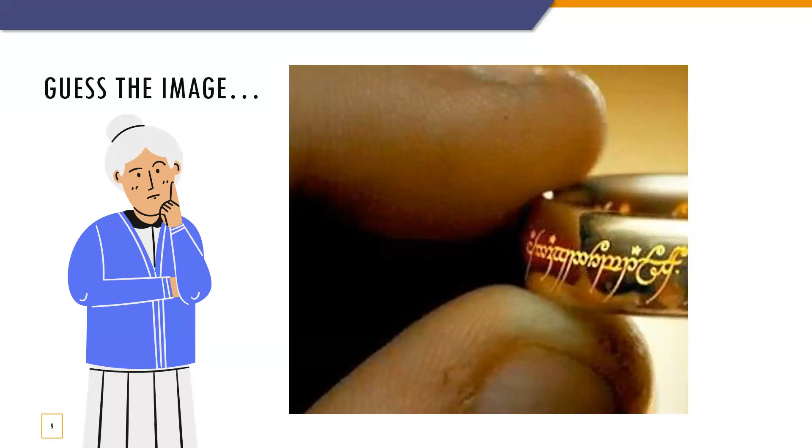Next one, who can guess this image? And I know this is going to give some folks some nerdy cred. Great, looks like many of you got that one - Lord of the Rings. All right, guess this image.

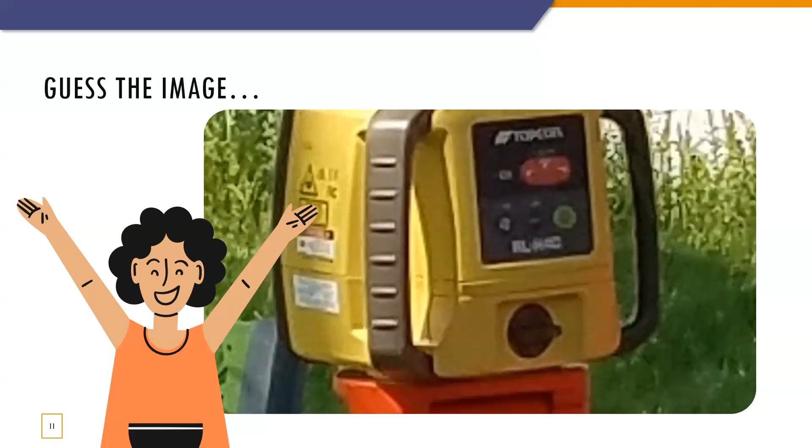Any other guesses? All right, well, it looks like Gabriel, you get the prize for this one. It's a laser level. All right, next one.

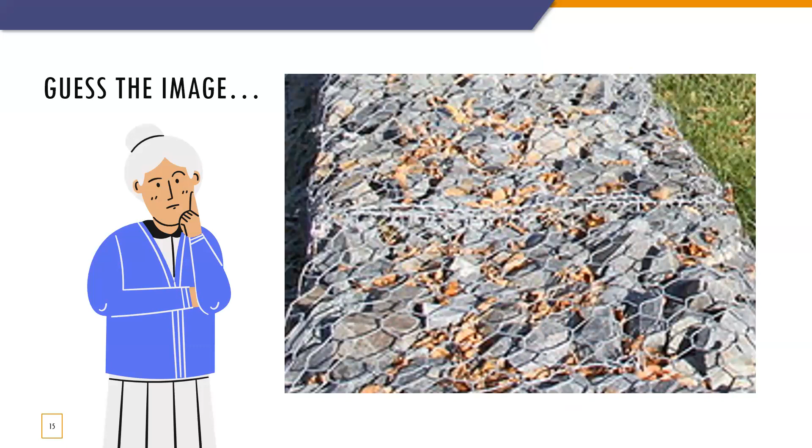All right, now this one is kind of on theme for today. What can you guess what this image is? Nice, all right, great job. Yep, gabion basket. And this is from a site in Baltimore, Maryland.

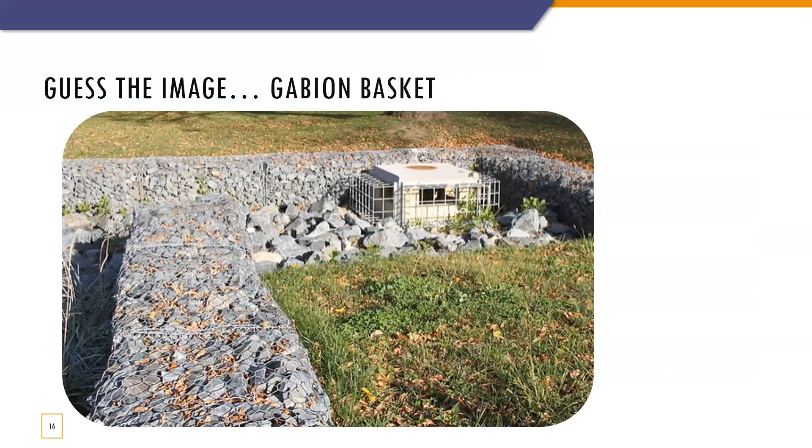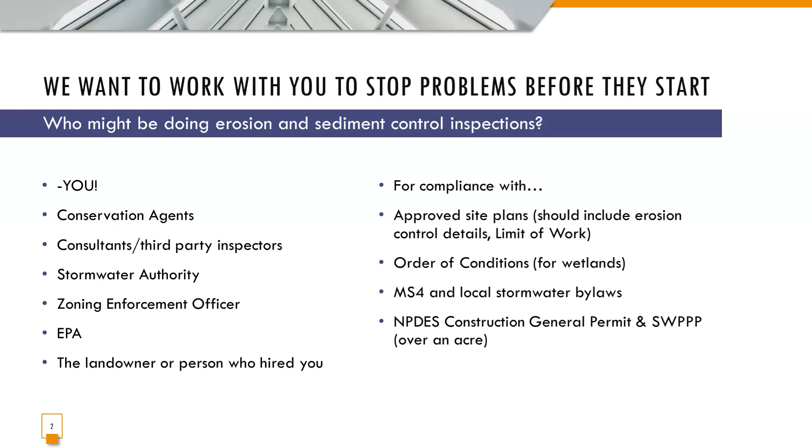So I did want to start at the beginning. A lot of owners and even some contractors don't realize that there can often be a lengthy permitting process before you ever get to put a shovel in the ground. If you're going through a local board like the Conservation Commission, the Planning Board, the Zoning Board of Appeals, or for your state permits, sometimes you might need MEPA review. All of that can take several months. I've had projects before my boards that can take in excess of a year, usually when we're waiting on engineering changes between revisions. That's unusual, but make sure you plan to have a healthy amount of time to get through that permitting process before you want to put shovels in the ground.

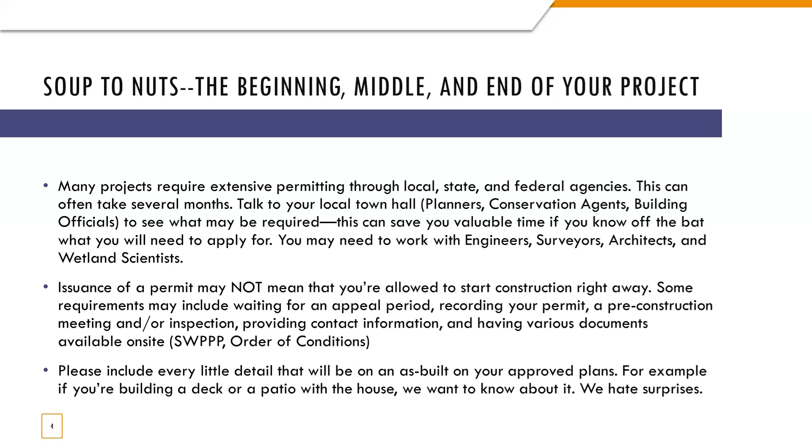So record your order, wait for the appeal period. You need a sign with your permit number. You need to let me know who is going to be monitoring erosion control on your site, whether there's a field engineer, and who the responsible parties are, so I know who to call when I want to schedule an inspection, or if I'm stopping by and see a problem.

You want to make sure everyone on your site understands what the applicable conditions are. And I always go out and do an erosion and sediment control inspection before you start work. So the first thing you do is put in your silt sacks, your perimeter silt fence, and straw wattles - that's before any cutting of vegetation or grubbing that needs to be installed.

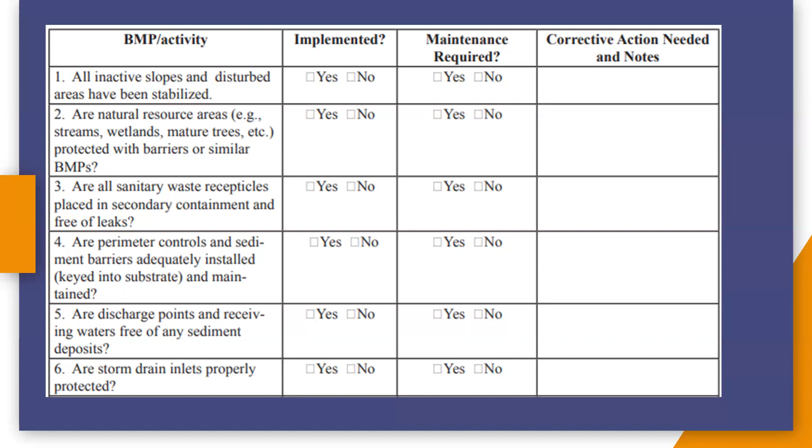Storm drain inlets properly protected. I'll be looking at construction entrances and exits, trash and litter, washout facilities. So making sure you're not washing out your concrete into your storm drains and into your wetlands is a big one.

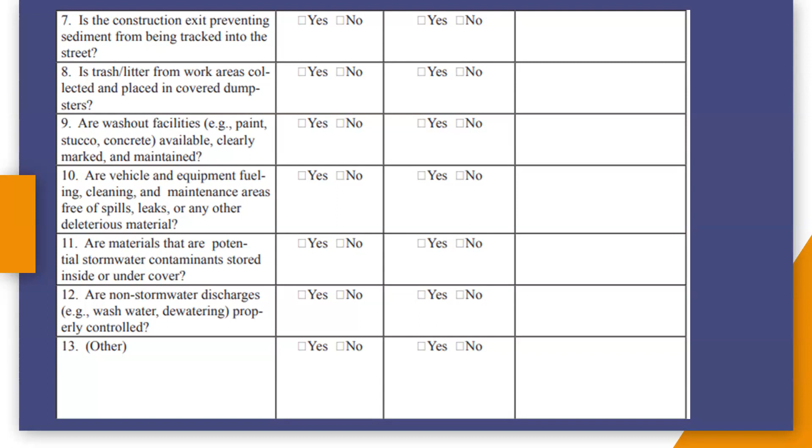If you have fueling, checking on that. Checking on contaminants, and then looking at non-stormwater discharges. If you're using wash water, if you're dewatering, maybe you're spraying for dust, maybe you're testing the fire hydrants on site, and what's happening to that water, and is it potentially causing a problem.

One thing that I want to emphasize is when we approve a permit, we really want everything that gets built to be the same as what we approved, except for your erosion and sediment control plans, which we really want to change with the needs of your project as needed.

Your project is going to be always changing, and what you're going to need on site is also going to be always changing. You may be required to have extra erosion control materials on your site, but if you're not, it's still a great idea.

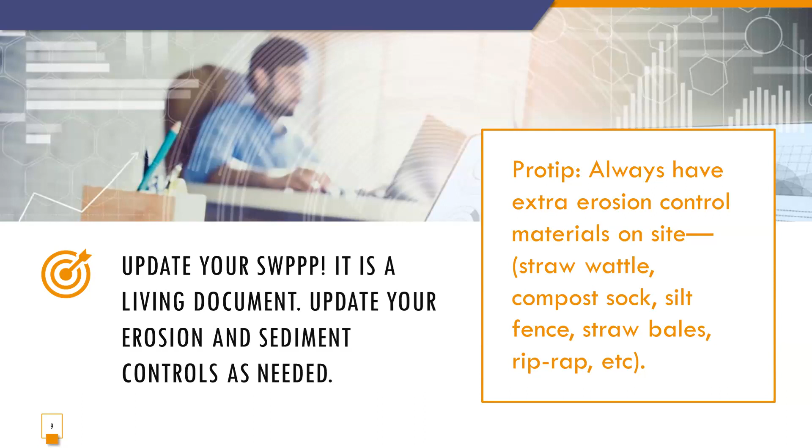Keeping extra silt fence, straw bales, riprap, whatever you may need to do a quick repair, a quick maybe second layer of erosion control to make sure that you're able to be quickly responsive to emerging problems or changes.

Some examples of things that I see often: you've been using one construction entrance that's properly protected, but for whatever reason, you need to go in through another way. And by now, maybe you're mid-construction, you didn't get the rocks that you need, and so you just sort of open it up.

Make sure your new entrances are stabilized. You're doing the perimeter controls around new places. Maybe there's a new source of water that you're adding to your site.

And checking if you're dewatering, if you're doing anything like that, making sure that your controls are working. So are your silt sacks catching silt? Are they clogging? Is your filter bag leaking? Right, just doing all of those sort of routine checks to make sure everything is working the way you think it should.

And we know that things can go wrong. Even the best laid plans can go awry, whether it's from unexpected bad weather or you hit a water main. This recently happened at a project in Norwood.

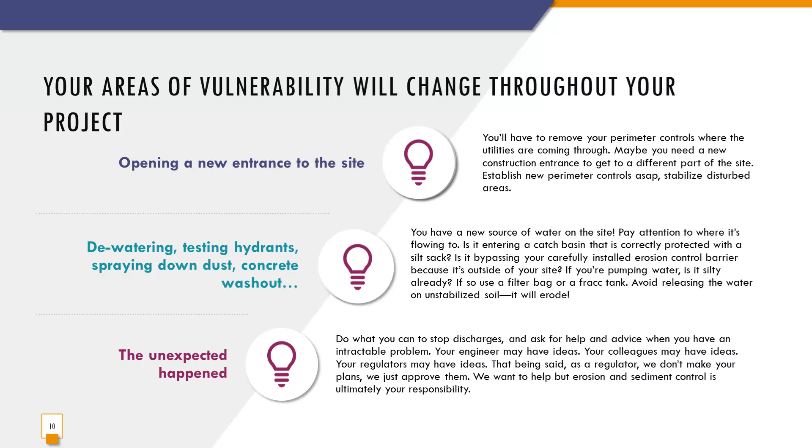So I wanted to end with just some fun photos from Norwood. This is a photo of a recent wetlands violation that happened because of a catch basin several hundred feet away from the wetland, and the catch basins close to the wetland were actually extremely well protected.

That's the one on the left. So I saw the wetlands violation first and then had to sort of backtrack and find out where all of this sediment was coming from.

I went to the site on the left first and quickly realized that it wasn't possibly coming from this site, and actually several hundred feet away from the first construction site I went to was another construction site that wasn't being regulated at that time by an order of conditions or by an NPDES CGP.

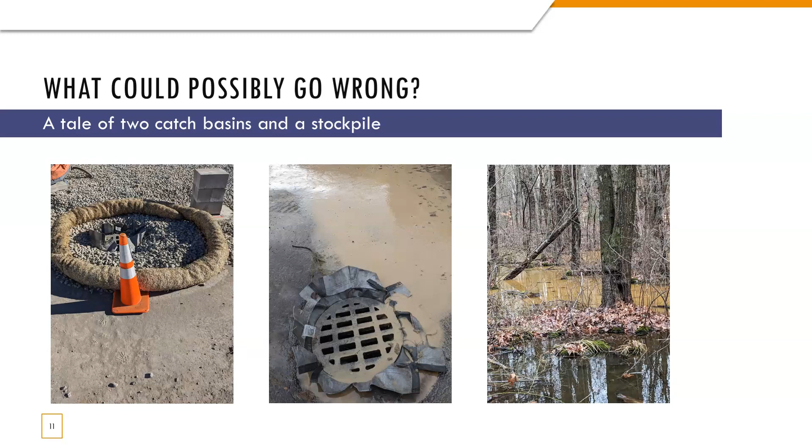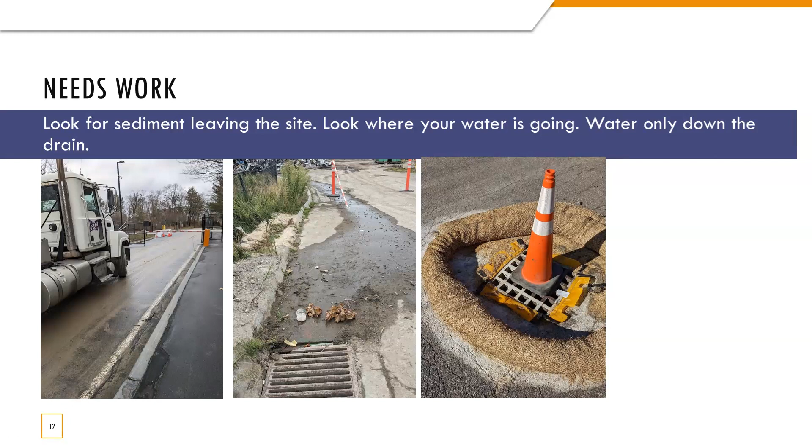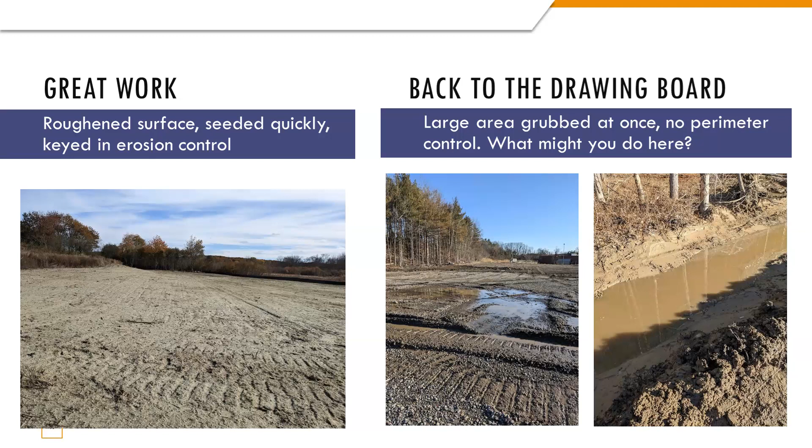And then at the site on the right, all of those things still need to happen. There's no erosion controls. Maybe they did dig this channel, but maybe we would want to see check dams or something like that in the channel to catch some of this silt. And there, it wasn't quickly seeded or tackified. So a lot of those things can really help when you have to go ahead and do that kind of grubbing on a large area, which is not recommended.

And then the last thing I wanted to mention as a regulator is that it's so important to close out your permits with us once you finish your project. For the orders of conditions that the Conservation Commission issues, those orders are recorded on deeds, which means that it may be harder to sell the house, or whatever the property is, whether you're selling it or whether it's somebody else's property and they're not going to find out that they have this cloud on their deed until 20 years down the road.

Either way, it's really important to wrap that up so that you don't find out too late that there's still work to do before you can close it out. One thing that we get a lot is, oh, I need a certificate of compliance today because I'm closing on this house tomorrow, or the opposite of, oh, this project was completed in 2004 and we never got a certificate of compliance. The engineering firm that designed it has closed.

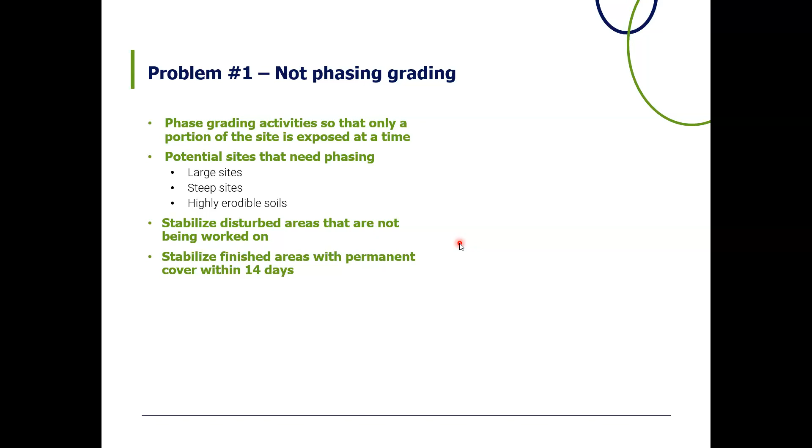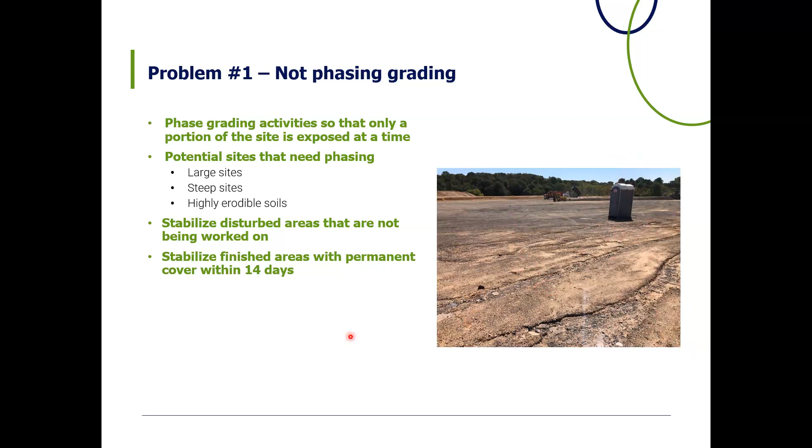So let's see some examples of good stabilization: matting and seeding. This is your erosion control blankets, and then hydroseeding is also a quick one that you can use to stabilize your area.

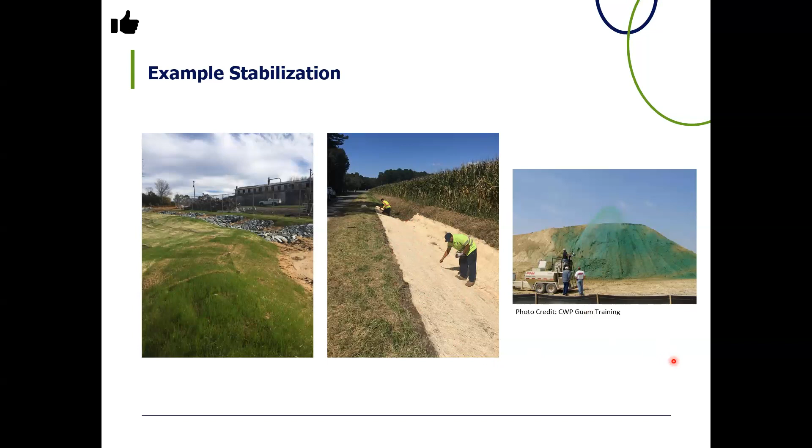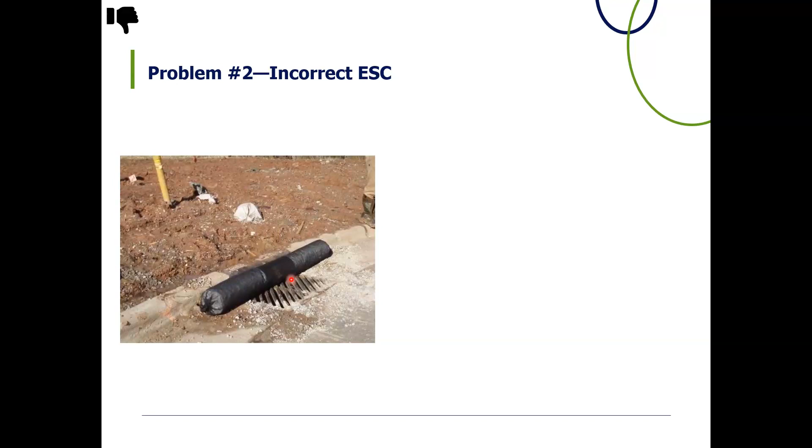Here's another one. This is not how you connect two different pieces of silt fence. Again, probably a training issue that people didn't know the proper way to do this. And also, if you truly understood what the purpose of silt fence was, you wouldn't have done this - there's obviously going to be a hole underneath between the two fences where water could go through. It's supposed to be a barrier for water to filter through the silt fence before it goes to the other side. So there's a little bit of training that probably was necessary for this situation.

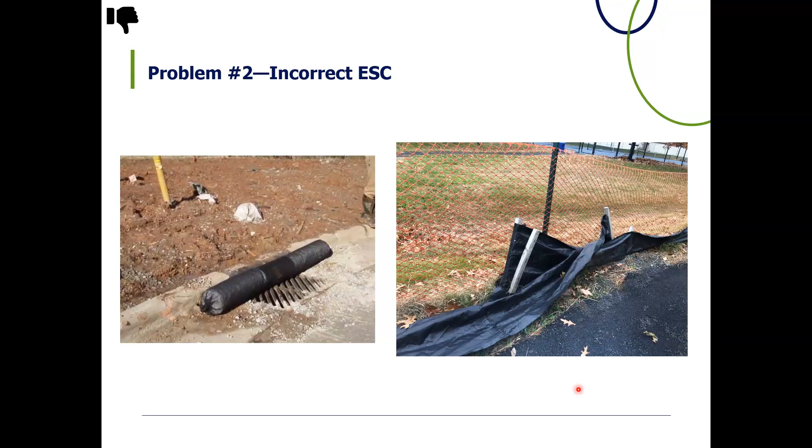Problem number 3, poor management of stockpiles. Temporary stockpiles should be stabilized with seed or other covers like a tarp. It should have sediment control around it, like a silt fence. And then it should be placed in appropriate areas. I think that one is one that people don't think of as much.

So this example is that it's on a paved surface, which is not ideal. Some places don't allow it, but some places do, because silt fence on pavement is a spec that some people use.

You shouldn't be adjacent to a stream or a storm drain. Don't put these right next to a storm drain, because if you have inlet protection, it's going to clog really, really quickly. Either you're going to have to maintain it all the time, or you won't maintain it and you'll just flood out your site. Or the guy maintaining it will just poke some holes in your inlet protection because your site's not draining. So there's a lot of reasons why you don't want to include these near your storm drains.

The other one that I think people don't think about as much is that it shouldn't be near concentrated flow. This site water flows towards those greenish containers through this valley gutter. So what's going to happen if it rains really hard is it's going to pile up into here, right? Water's supposed to go in from the parking lot outside of this picture. It's just going to run straight into your stockpile and erode all of it away downstream to your next inlet. Being smart about this really just saves the contractor time, so you don't have to keep maintaining it and you're not losing your stockpile either.

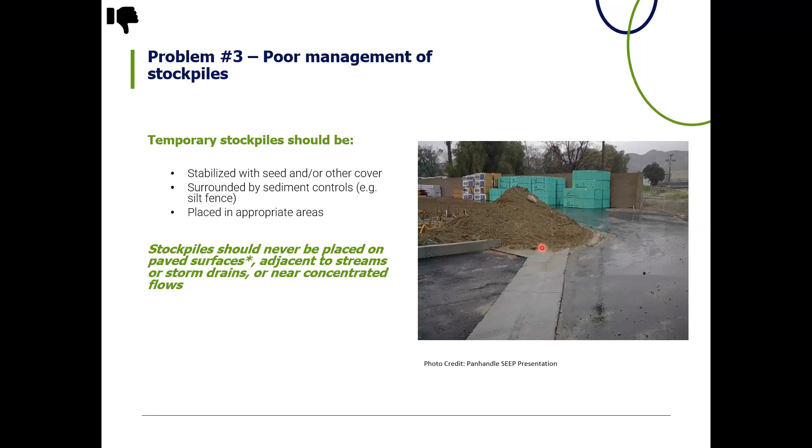Here's another example of BMP maintenance. Even if the best BMP could be installed, if you're not inspecting and maintaining it, it's not going to work properly. This is a filter bag that probably got clogged and needed a new one. Instead of maintaining it, the contractor said, my pump isn't able to pump through the filter bag because it's clogged, so I'm just going to poke some holes in it so the water can leave. That obviously defeats the purpose of the filter bag. The point of a filter bag is to filter out sediment before you release it, but look at how much sediment you're releasing into the water.

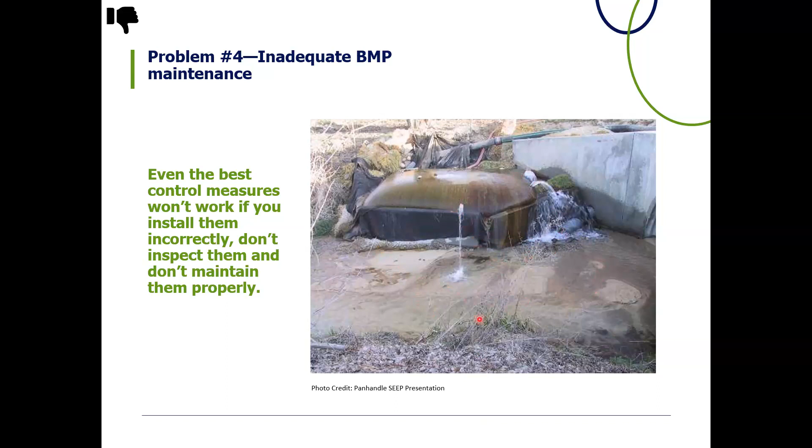You should really inspect daily and after rain storms, definitely after rain. Here's an example, and it's actively raining in this picture. It's a little hard to see, but this probably was already filled up fairly high on that silt fence before this rain happened. Sometimes it just rains a ton and it's really hard to control.

Erosion sediment control is typically designed for like a 2-year storm, so for those really big storms, you can't stop everything. But in this situation, this silt fence did not have enough room above it to hold in even a tiny storm. I think they were grading the dirt into the silt fence, so there was even less space to allow water to filter through. You really should check to make sure they have the capacity to hold the water that's going to come.

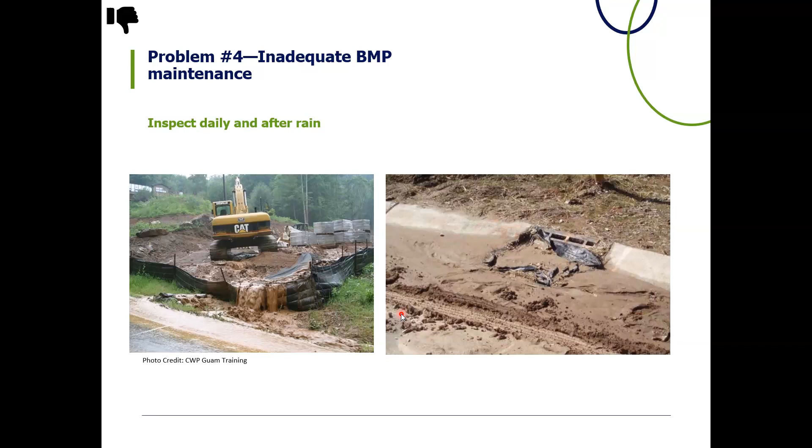Just another example of likely erosion from upstream clogging this inlet. Water is just going to end up ponding right there because it can no longer filter through. In every catch basin, we're not covering it completely so water can't get through—there should still be some filtering before it goes into the inlet. In this situation, water might be able to go through these holes, but there's just way too much sediment on here for it to really work properly.

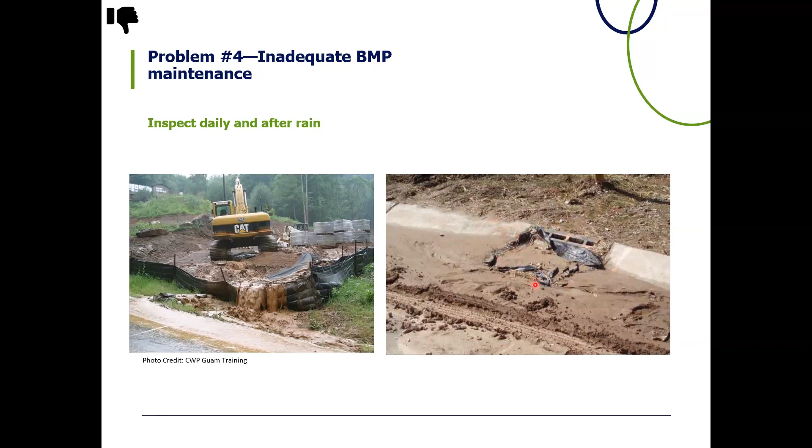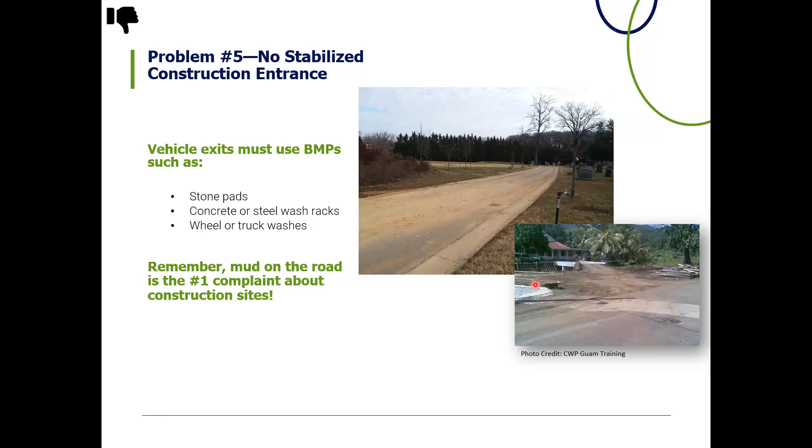Problem number 5: no stabilized construction entrance. I think Holly talked on this point. When a vehicle leaves the site, it should roll over some stone pads, like a stabilized construction entrance. You could also include wash racks or washing stations before vehicles leave the site. Mud on the road is the number one complaint on construction sites, so it's something you should be aware of. Here's an example of a really nice construction entrance.

They have these fences so you can only enter in this one direction. Sometimes you have a stabilized construction entrance, and then a contractor might go like 10, 20 feet down the road and drive off, not over your stabilized construction entrance.

So this really only allows your vehicle to travel into the site through one entrance. The rock is clean. Stabilized construction entrances don't last forever - it depends on your project, but it might not last for your whole project time. And once it gets clogged and isn't able to shake the dirt off the tires, you should replace the rock.

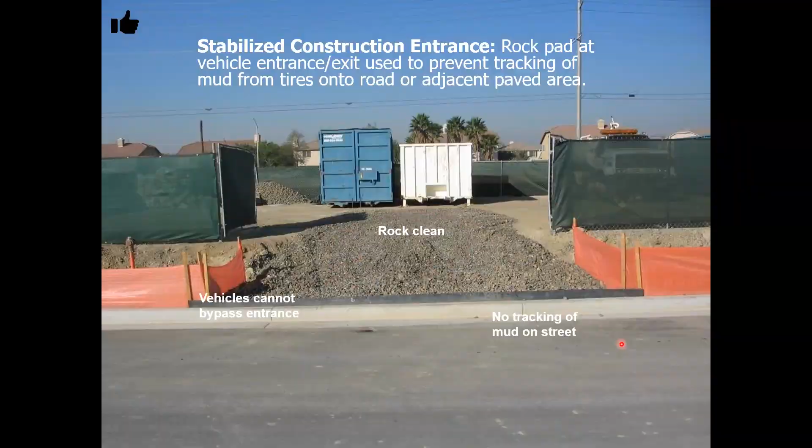Problem number 6, dewatering and other pollutant discharges. You should never dewater directly into a stream or into unstable soils, like steep slopes or erodible soils. You really should try to find a flat, grassy area where you're dewatering into a filter bag or a sediment trap or sediment basin, to allow some of that sediment to fall out or be filtered before you release it off your site.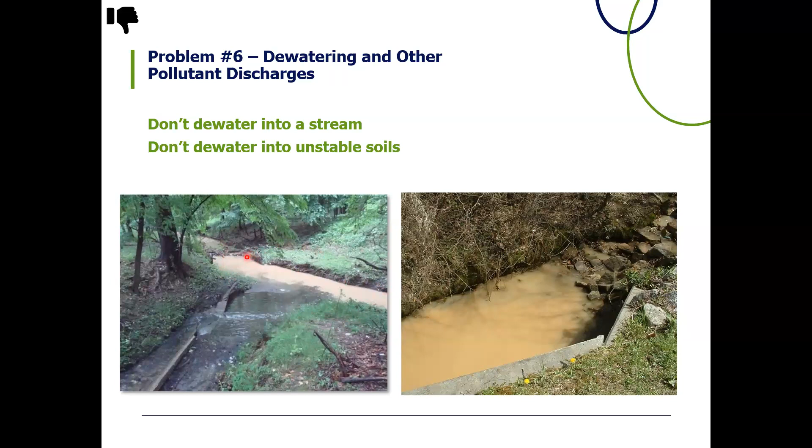But in most situations, you want to protect your inlets, because that's where water is potentially leaving your site that is not clean and not filtered.

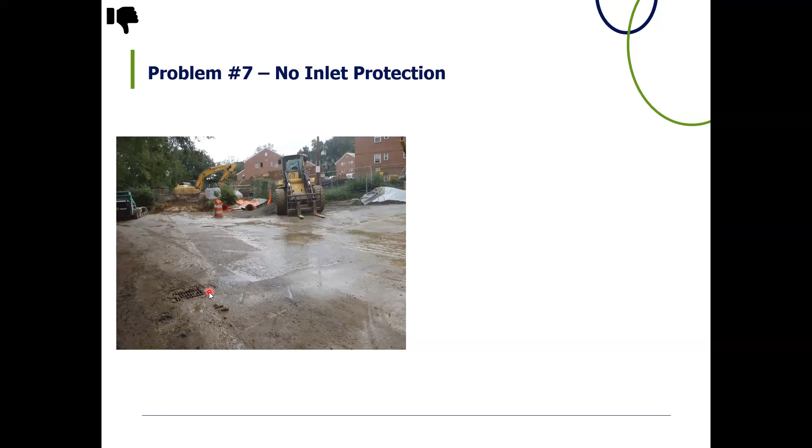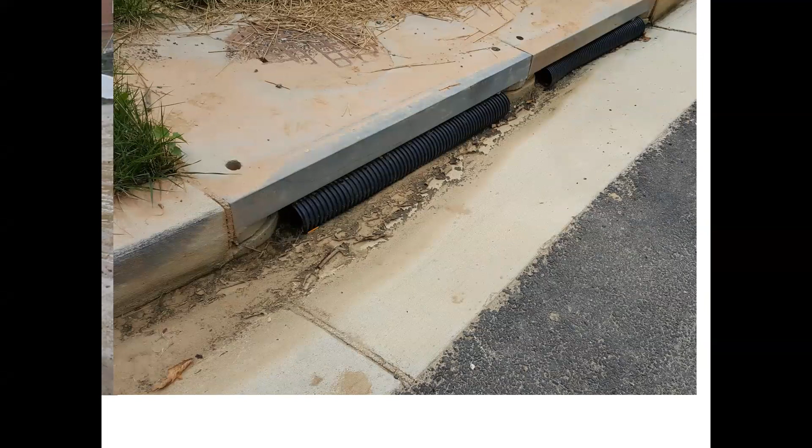Here's another one - this might actually fit better in the erosion sediment control section - but this inlet is covered. It kind of looks like a filter log, I don't know if the picture is close enough to see, but they're not filter logs, that's a corrugated pipe. Whether the contractor just didn't have filter logs and thought this looks close enough, I don't know what the situation was, but obviously this is not proper inlet protection, because the unfiltered water is just going to flow right into the gap that exists here.

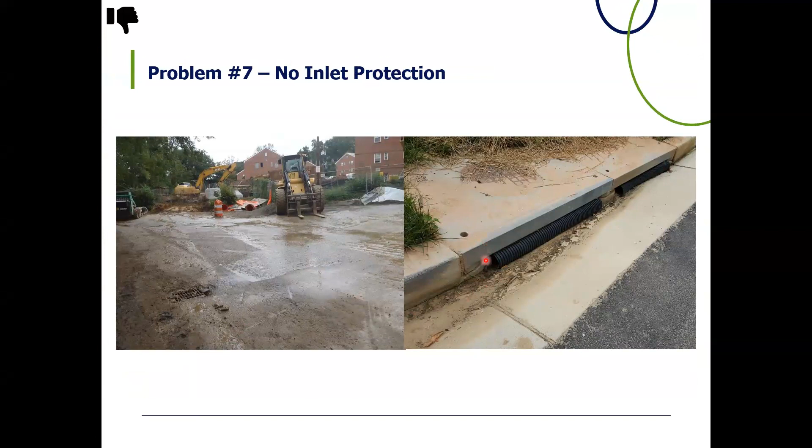Problem number 8 is not protecting the site. Really, this issue can start from the plan review side - delineating and making sure your natural resources are delineated correctly is really important. But then the contractor actually delineating and making sure they're protecting the areas is also the next step.

Protecting areas like wetlands, forested areas, and streams. Another issue in line with that - you might have delineated your area, but if the contractor doesn't stay within their LOD, their limit of disturbance, that can cause problems too. The LOD is there for a reason, because in the planning phase they planned to protect these areas, so you can't roll your excavator over those areas.

One other point that's a bit different from the rest of this presentation: you should not compact soils if that area is meant for infiltrating stormwater control measures. For example, if you're putting in an infiltration trench or a bioretention area, it shouldn't be along the main path of your construction site where your excavator is rolling over and over again, because the whole point of that area is typically for infiltration. So I've seen some contractors put silt fence around where an infiltrating practice, like permeable pavement, is going to be, so they're not compacting that subsurface soil.

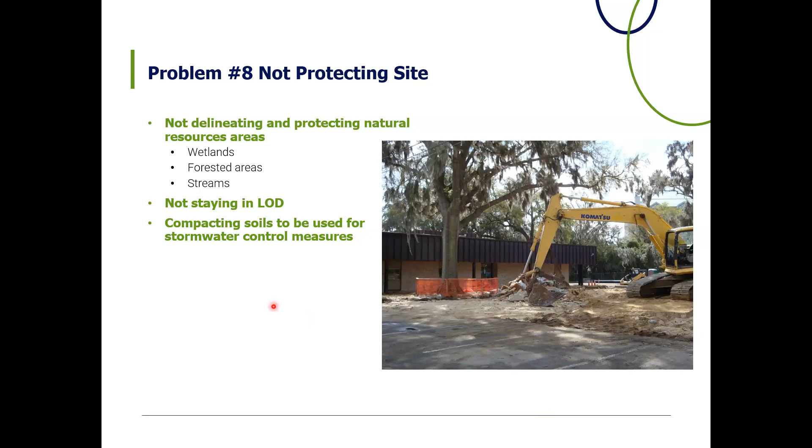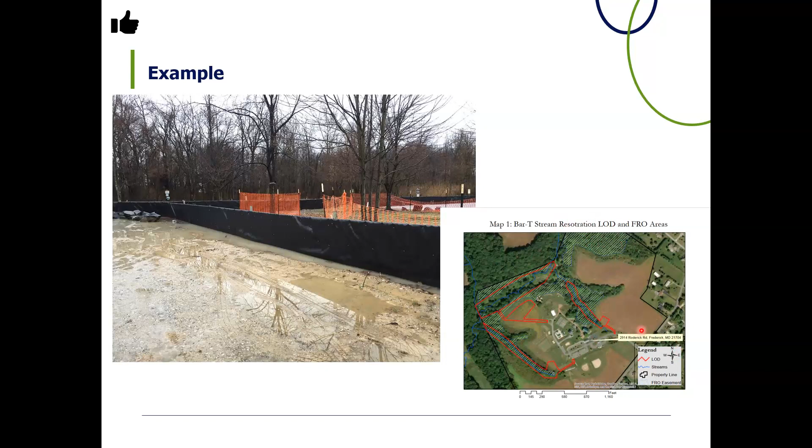So this is a great example of a protected area. A lot of times on your plans there will be designated protected areas, and it's kind of - you start there and look to make sure you're delineating on site, fencing off the correct areas. Sometimes it will look like this - this is a forest retention area. On the other side there, I think it was a forested area, and also there was a wetland on the other side as well.

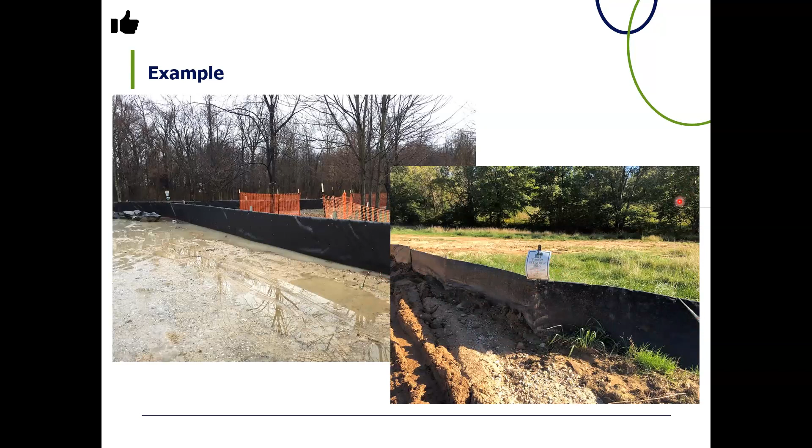So that's it. Are there any questions?

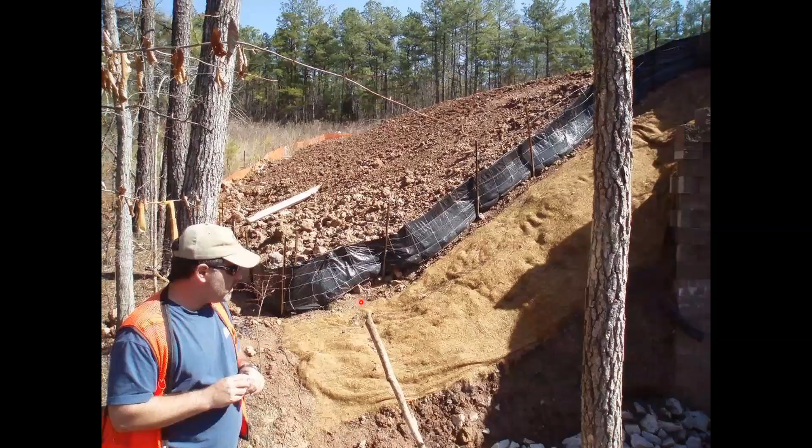Okay, now I'm going to test you all about your erosion sediment control knowledge. Next I'm going to show some pictures, and you guys can unmute or put in the chat box what you see. We can start off with what issues you see in these pictures. So here we go. What would you do differently? What would you suggest? What is wrong?

Silt fence not toed in. Yes, exactly, thanks Deb. Silt fence going the wrong direction.

I'll just start with each one. Silt fence not toed in - you really have to key in or toe in your silt fence at the bottom. In almost every single spec of the silt fence, it tells you to dig a hole, stick the silt fence over, and put the dirt back on top so that water, if it were in the right direction, when it rains, won't just slip underneath it. The whole point of a silt fence isn't to hold that rock in place, it's just to prevent dirty water from leaving your site. So if the water can just sneak underneath, it's not working correctly.

Silt fence should be placed on the contour, but right now it's perpendicular to the contour. It should be placed this way instead. It's not the proper use of silt fence because it's meant to create almost like a sheet flow of water leaving your site. Water is not really going to move sideways like that. What's going to end up happening, I think, is the silt fence eventually goes flat this way, and all the water is just going to puddle up on this side. It's very unlikely, unless it's backed up, to come onto the edges.

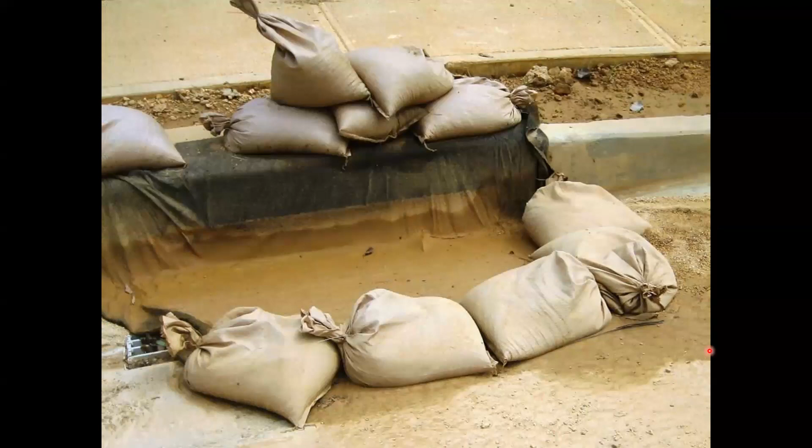Alright, next picture. What do we see here? So this is obviously an inlet. Do we think that this would work properly? Gappage, yeah. So if this corner of the picture was covered, you'd think that could work. But what I think is most likely happening here is that the water wasn't leaving, so the contractor went, I'm just going to push this aside so the water will stop flooding out my area.

Because what we can see is that the filter fabric or geotextile needs to be replaced. It's clogged. Your inlet protection is not meant to be a one-time deal, like put it down and you're good for the rest of your construction project. You do have to maintain it, you do have to go in and replace it. So making sure you go back and remove these and replace it with a clean sheet is really important so that you don't have to end up with this.

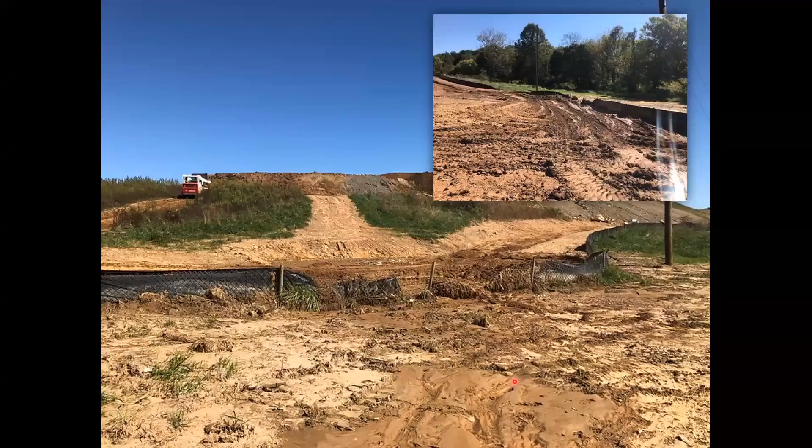Alright, I think this might be one of my last pictures. What do we see here?

If it wasn't draining and they needed it to drain, what should they have done in that situation? That's a good question. I don't know what they have available on site. I don't know if Holly can answer that question better than I can.

Or someone else. I think you were spot on with saying that they needed to replace that filter fabric. It looked like the filter fabric—this is getting nitpicky—but it may have been a felted filter fabric, where a woven fabric is going to be a little more effective at allowing water to drain through without clogging as quickly. But really, that replacement you recommended would have been what I would have done. If you don't have more fabric on site, consider what you do have that you could use to protect that inlet.

So can you surround it with gravel? Can you surround it with— that's maybe what I would do—surround that catch basin with straw bales or with gravel, if I misjudged and didn't have replacement silt sacks or the first BMP on site.